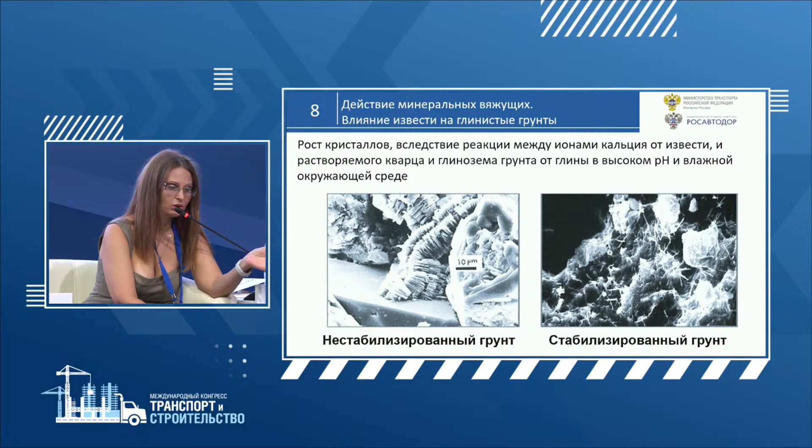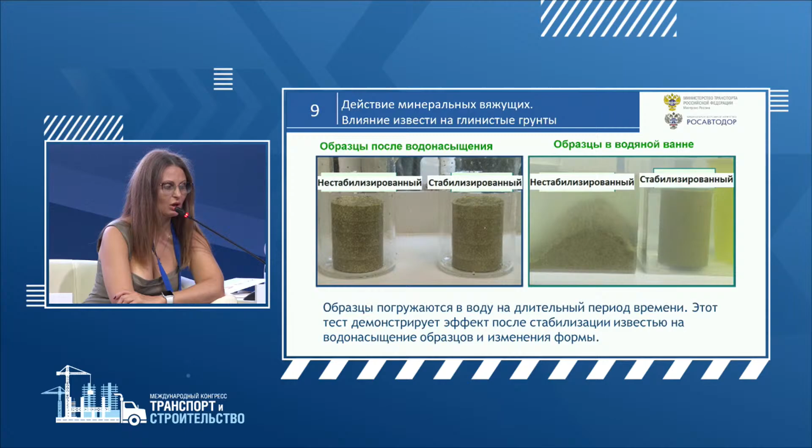And now we see what lime does in such soils. This picture shows, for simple understanding, examples we placed: one was strengthened, one was stabilized, and one was non-stabilized. After water, you see in the pictures the material just turned into a pile, but the stabilized one kept its form, and the same will happen with the road.

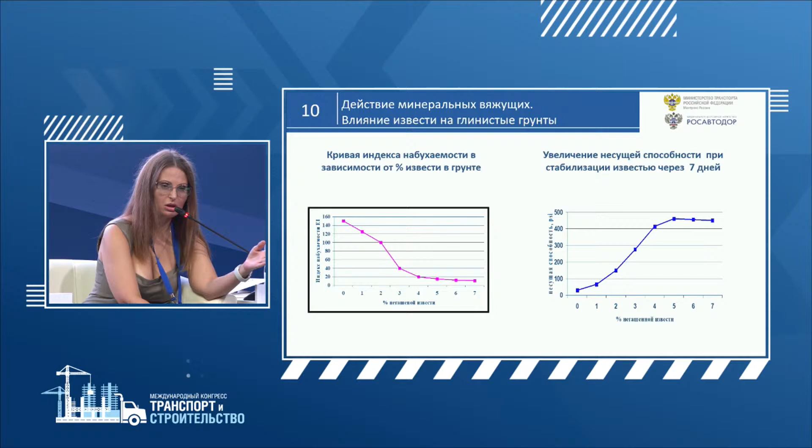And what can we do to establish this road, to commission this road? We need to answer the question: which day, how many hours do we need for the client to commission this road? When you get the contract, you think the project over. This project includes technological cards, your technological cards according to the norms.

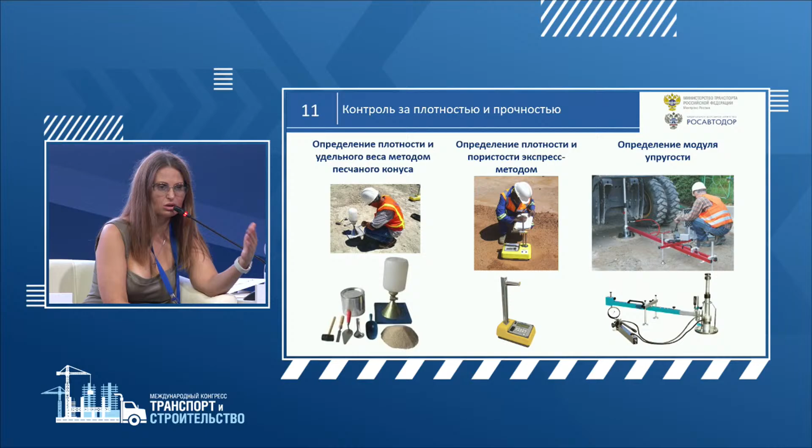The information about the commissioning and the time limits for commissioning should be included in these technological cards. On which basis? You can just show it. Maybe you don't need to wait for 28 days. You may control the density and porosity level. But if this soil is strengthened enough, this modulus will show the results practically at the same time.

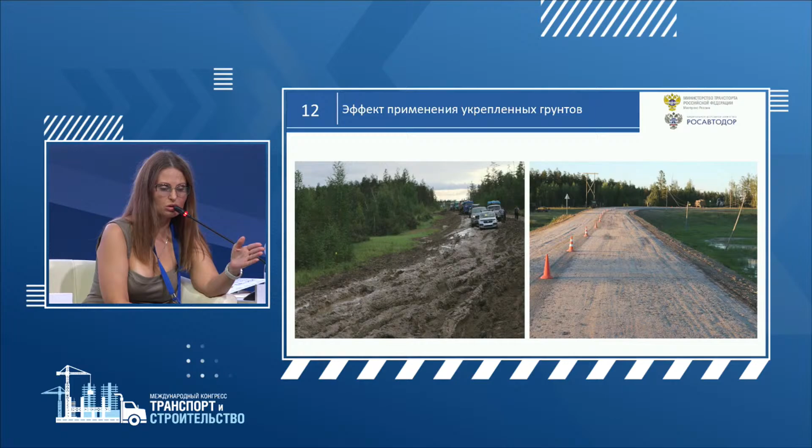This slide shows the effect of using strengthened soils. This is a very bright picture of a real road in the Kolyma region. The soil shown here exists at some places. This is semi-permafrost, and this picture shows what happens with the rain coming. What can we do? We can stabilize it and make a very good base for the road.

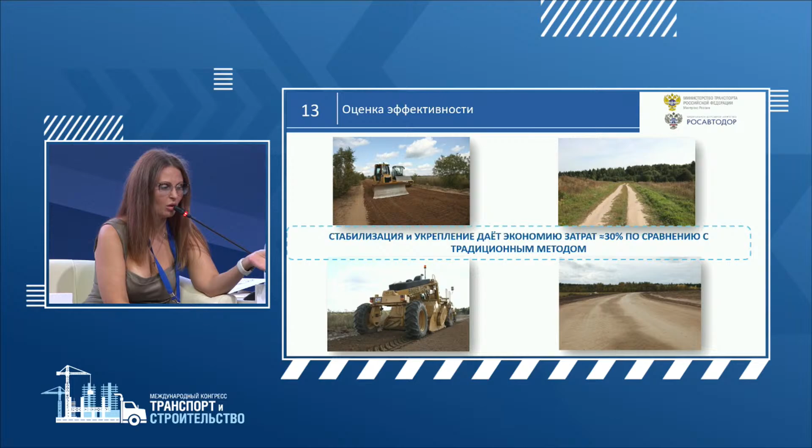The economic effect is calculated. Firstly, there is a 30% economy in financing. You don't need to bring extra material except for some binding and the equipment for introducing this binding. So we move on to the new technology: regeneration of the road pavement layers.

It's great that the Republic of Bashkortostan never surrenders and doesn't stop the work. I'm involved in this project, and it's great that this work goes on. So, regeneration of the pavement. We use it when there is a road and we need to return it to the normative state. This allows the road workers to repair the road.

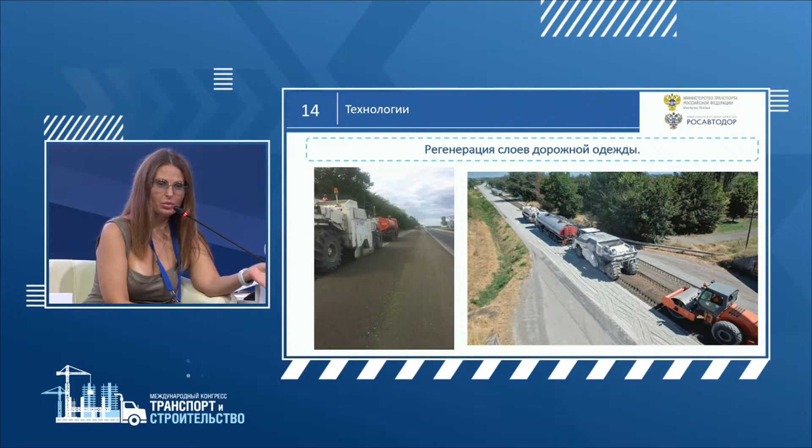We use old asphalt. We use the base that it has. We work with some binding, complex binding or mineral binding, and then move on with this technology. And then we get a sustainable layer. There are the documents. Of course, there is a problem in that PNST 306 stopped working in November 2021.

But I want to say that we are talking about state norms, and they're working on it, in this field and in many fields. They're doing a great job. There are a lot of tasks for us, especially since Western help stopped; now we need to work on ourselves. But the old methodological recommendations never disappeared; they exist. You see these norms. There are some life hacks, as I call them, that we may use in work.

Regeneration is the technology of reworking the old asphalt material. What is included in this regeneration process? We cut the layer, break it into pieces, then we mix these components. Generally it's easy. The peculiarity of this technology is restoring the monolithic state of the construction, and it is required when the existing asphalt layers look like crocodile skin. The upper level is in a state where it should be taken out.

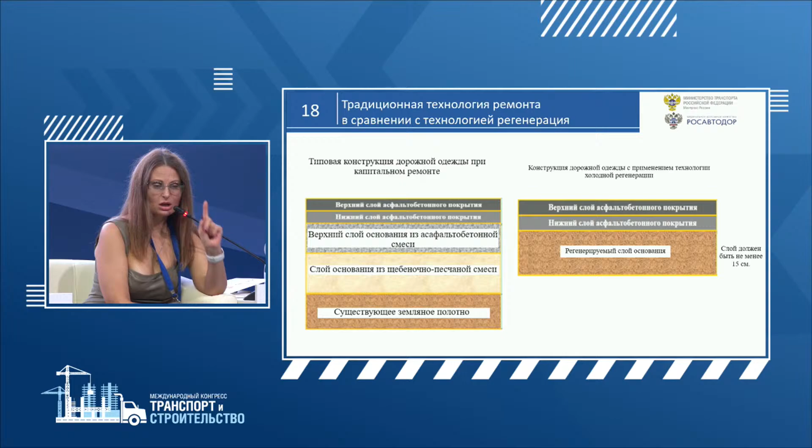Pay attention to that. This regeneration recycling lets us achieve the strength, and thus we can lay 1 or 2 layers of asphalt concrete, again paying attention to the type of the road and the intensity. But also, here's a tiny note: the regeneration layer shouldn't be thinner than 15 centimeters. Please, design engineers, clients, and everyone, pay attention that only 15 centimeters will work.

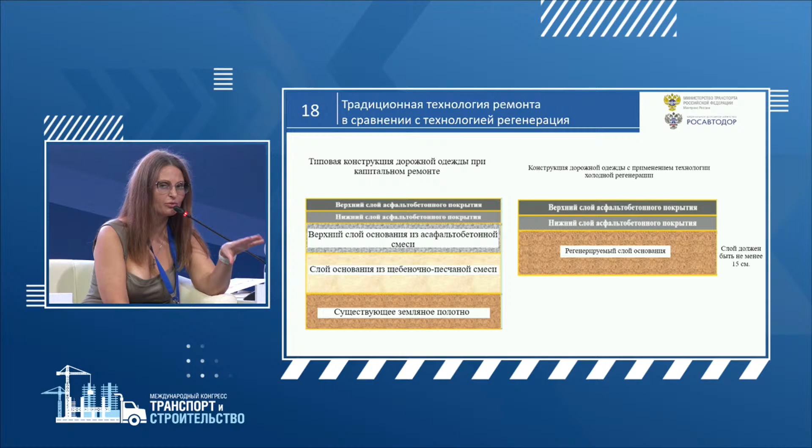Everything that's thinner will not, especially if machine recyclers are applied here, because the machine with a thin layer will not work properly. It won't mix it in the right way. Some people say yes, some people say no about the work of these machines, but they agree that this is the optimal 15 centimeter layer that we need to maintain.

Talking about the selection of recycling materials, when people start selecting this, there's a question: how much new material should be added, how much bitumen or cement should be added there? Well, actually, everything is really easy. Especially for this presentation, I divided the whole process into stages. First, we need to understand the thickness of this package. We should analyze the site with estimation of asphalt and cement that was applied earlier. We also need to understand the places for samples and take some drill samples.

We can't take those drill samples or core samples along the axis. When our presentation finishes, you can take these slides and understand these stages for yourself, because here they are written in very good detail. Also, you can see the amount of bitumen in the samples and how much crushed aggregate remained in those samples, and the amount of cement material can also be understood. People always ask me about that, so that will be a really good manual for you.

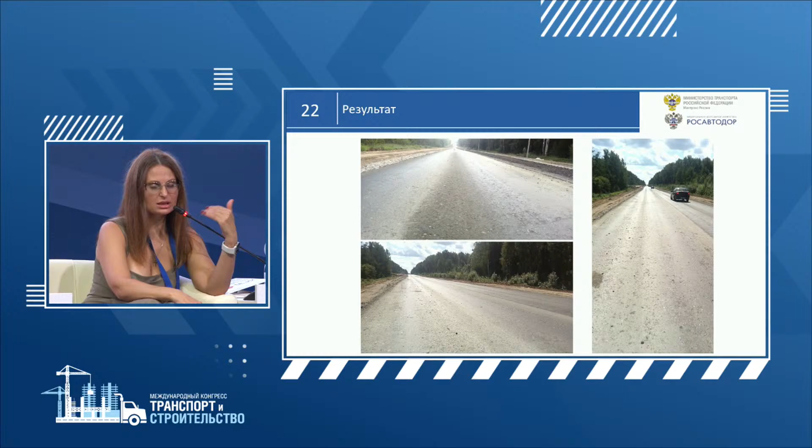One more thing: regeneration or recycling, stabilization, strengthening soil. The flatness of the surface is the basis for the strength, for the solidity of the lower layers. In the picture you can see the perfect surface, because if it's different, when cars are driving over the surface, some destruction appears on the top surface and everywhere. So the flatness of the surface is very important.

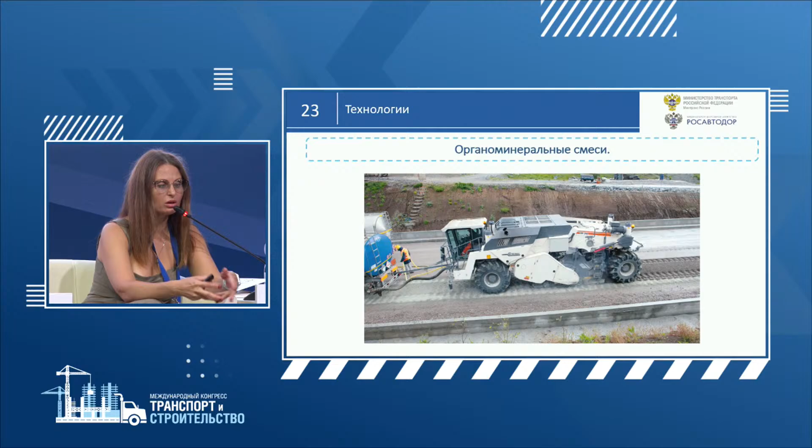Also, organic mineral mixtures are very important as well. In our country, organic mineral mixtures are not widespread in application. It's very sad, because I worked in the northern part of our country, and when I came back here, I saw that here this technology isn't really applied, and it's very good.

There are some regulations like GOST 30491 and PNST 632, which are written very well. Also, PNST 306 refers to this type of technology, and all of them are really good for the layers or foundation, especially the top foundation layers, and they work very well in terms of flexibility and everything. And if we talk about compression, it also works perfectly well.

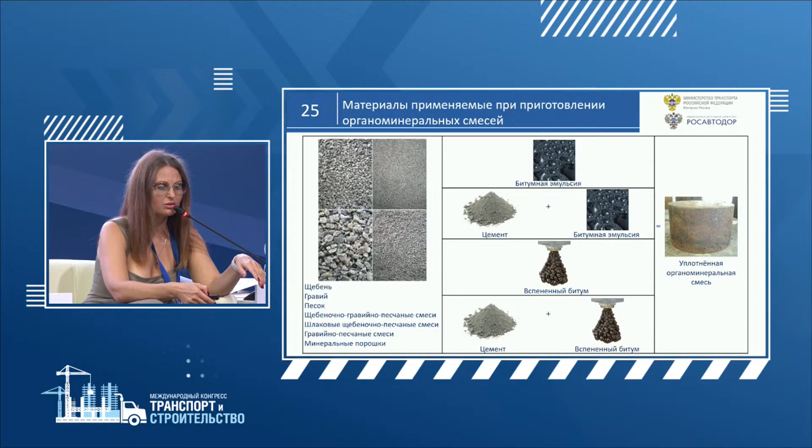Here on the slide, you can see different materials used for organic and mineral mixtures. When we select materials for this mixture, we always need to add some bitumen emulsion or binding, because it's included after we hydrate the material. Very often we get negative feedback on this technology just because this basic rule is violated in the first stage. So we need to introduce this emulsion only into the hydrated, moisturized mixture.

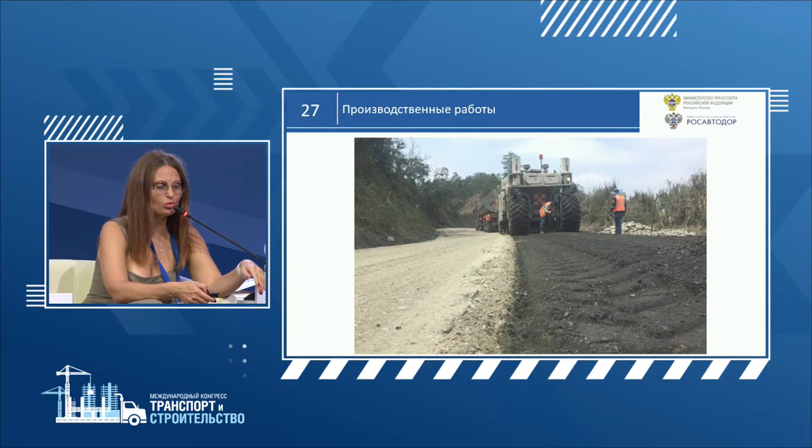Here in the picture you can also see lab samples being prepared, and also production works with different types of recyclers that provide good results. The most important thing is comparing where it's better to apply these mixtures in the constructive layer. Usually organic mixtures are applied under the asphalt concrete layer according to PNST 542, and this emulsion helps in forming the constructive layer for the foundation. If this mixture also consists of strengthened soil, that will be the best solution for road foundation construction.

So nowadays the Kazan-Yekaterinburg part of the road will be built with this type of road coating construction. We've agreed on that.

One more important thing: all materials and technologies that consist of cement active binding substances should be treated in the right way. The layer should be covered to avoid loss of water, because if it dehydrates, the mixture will stop working. This prevents you from getting the necessary characteristics of the layer, or the proper application of bitumen emulsion, for example, or any other strengthening material.

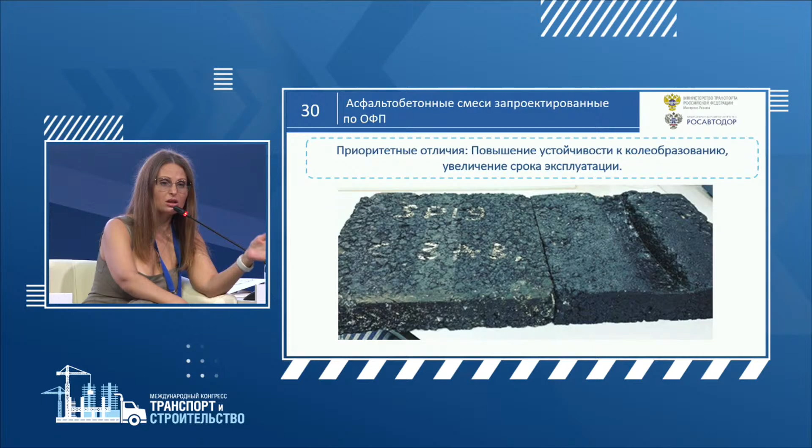We're moving to the last but not least technology, which I think is really efficient for construction: the volume functional design of construction mixtures. That's some kind of appeal for road constructors, clients, and road builders that will help us avoid wheel track someday. If this is built on a very strong, solid foundation, we will finally stop repairing and start constructing - that's what we really want.

Those asphalt concrete mixtures designed with this volume method have the following advantages. In labs, when we compact those samples, we reproduce what's going on the road, because the gyratory compactors reproduce all the compactions from different road vehicles that follow. Everything we compact is bound to all the exploitation parameters.

Also, control of everything can be implemented online - we don't have to wait for lab results from drill samples and so on. We can also understand the climate zone, not just by looking at a special table, but understand exactly what type of material and binding we need to apply in a particular climate region. Also, now we can understand the transportation load for designing the asphalt concrete mixture and so on.

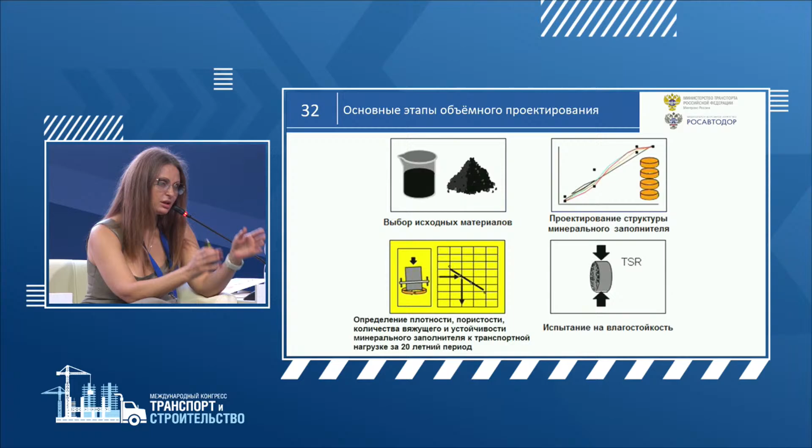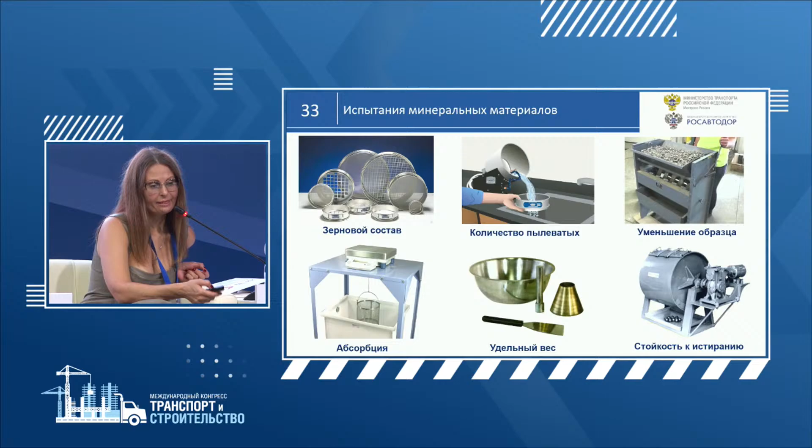But now I would like to ask you to take tests for water resistance in labs when you use this volume technology, because you can't avoid this test. Sometimes you think, I may not do this test because I'll understand everything anyway - but no, please do that test and don't lay any concrete without this water test. We also have very simple equipment for checking the type of materials and everything.

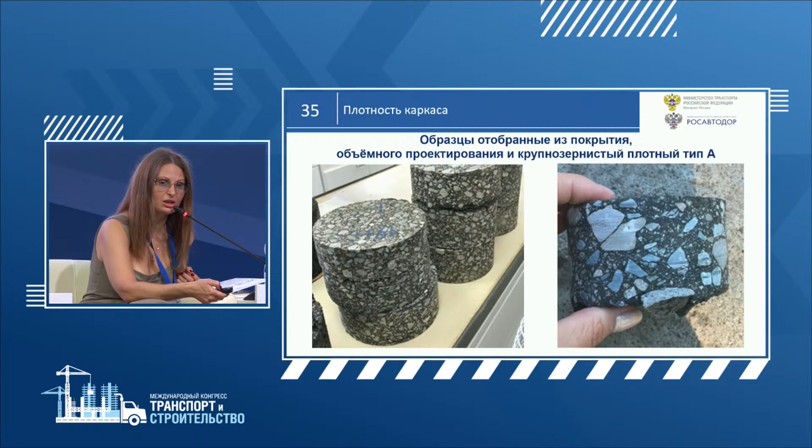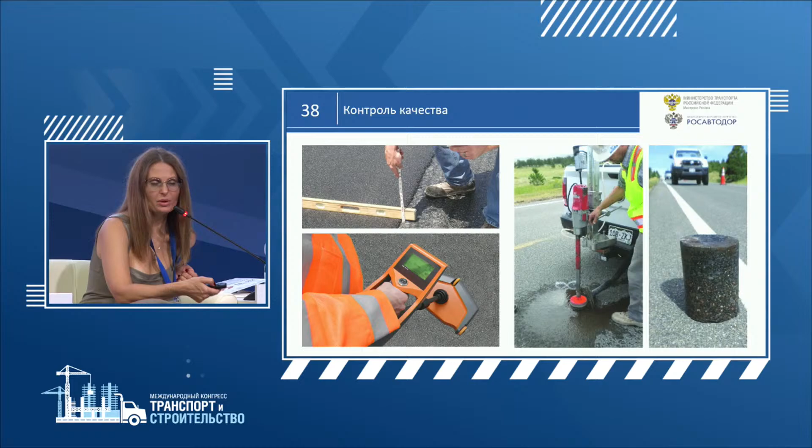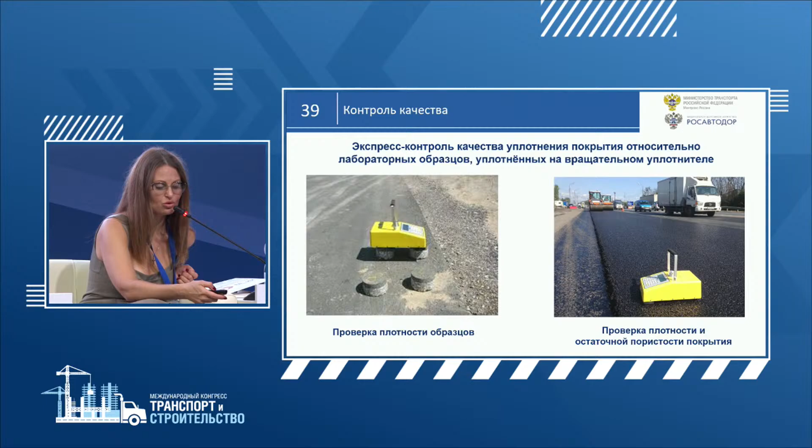So of course we need to pay attention to the quality of concrete, and when it's being issued from the asphalt concrete mixing plant, we need to pay attention to the quality of roads, and we need to pay attention to the culture of labor and work. When people start appreciating their labor and their work, all the roads will become really good and of high quality. The incoming quality control is really easy as well.

It lets us observe the increase of density online, and it influences the quality of the laying as well. We don't have to wait, we don't have to worry. That's great. So thank you very much for your attention. Thank you.

Olga Gennadievna, thank you very much for your intense and informative speech. Of course, we are out of the time limit, but this topic is very interesting. We're very grateful that we are in trend, that we start producing this asphalt concrete mixture. So as we move on in this field, it's very nice that there is UFA on your slide because we're here. And I would like to say furthermore that we need to stipulate to stop using some norms, of course.

We can't forget about type A. Maybe some roads need type A. Some road arteries need this technology of Superpave. So it's important to understand that the main load is from the wheels on the top layer, but this load is on all layers. It's distributed on all layers, and this wheel track appears not only on the top one.

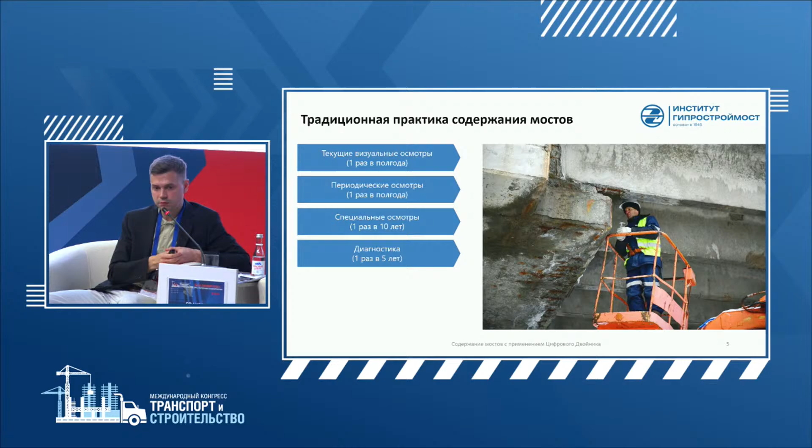So the master has complex surveillance: visual, periodical, special, and diagnostic ones. All these look-throughs are collected into one data set when the planning of the reconstruction starts.

Traditional practice has some drawbacks. First of all, these works on surveillance happen at some stated time, and the technical surveillance has a reactive character. So the repair work starts after finding the damage. We also have this handling method.

Then the documentation can be kept in different and hard-reaching places, and the documentation doesn't have actual data about the factual bridge condition. The documentation is in paper form, so modern technologies can't be used here.

Then our experience in the exploitation period, we use it in projecting new bridges. This could help the sustainability and safety of such constructions together with our experience. According to an analytical report made by a consulting company, it was shown that the usage of paper data at the exploitation level enlarges the funding by 10 to 17%, which is a lot.

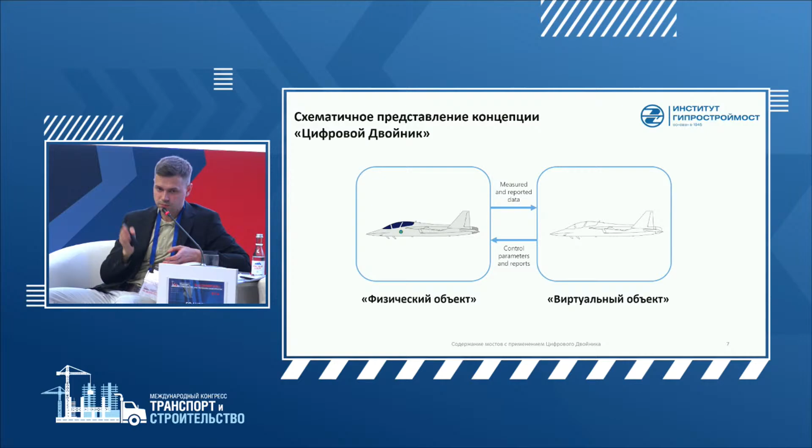So to solve these problems, digital twin can help. A digital twin is when a physical object is synchronized with a virtual one, its digital copy, in real-time measures. Together with this two-sided information interaction, this object, whatever it is—a car, a bridge, or a plane—exists in two worlds: a real physical world and a digital one.

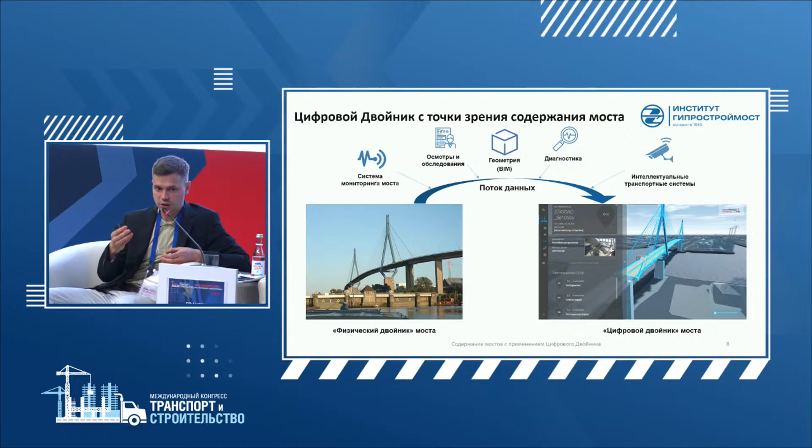So according to the maintenance of the bridge, the point of the digital twin is to integrate different data coming from monitoring systems, from classical look-throughs, from intellectual transport systems, into the digital model of the bridge. This digital twin gets new information, uploads new information, and we always have actual technical documentation in 3D of our physical object.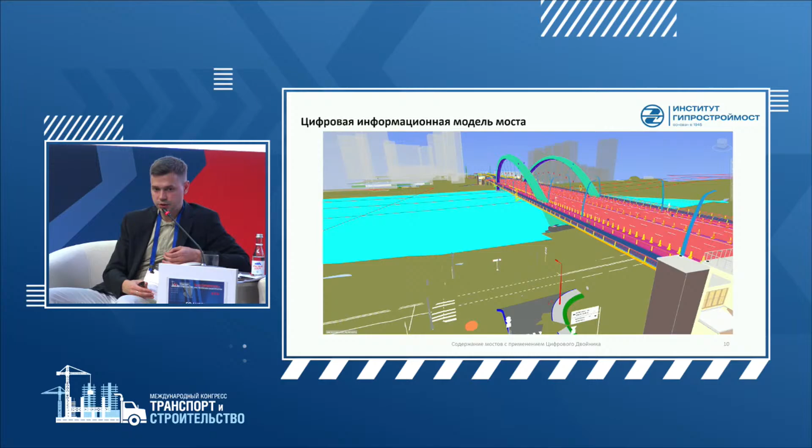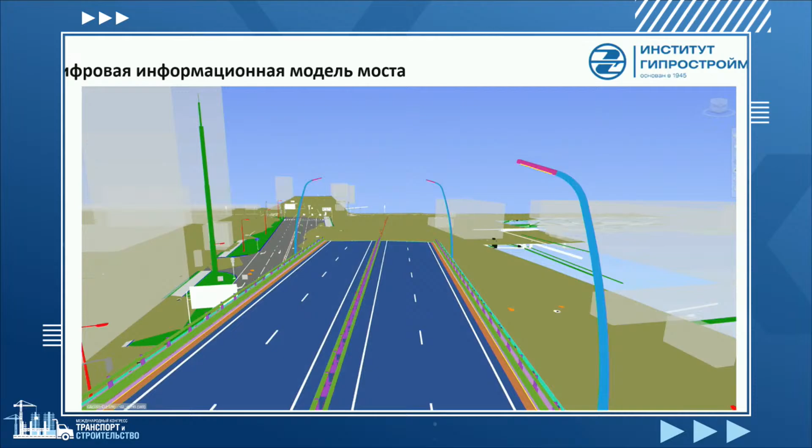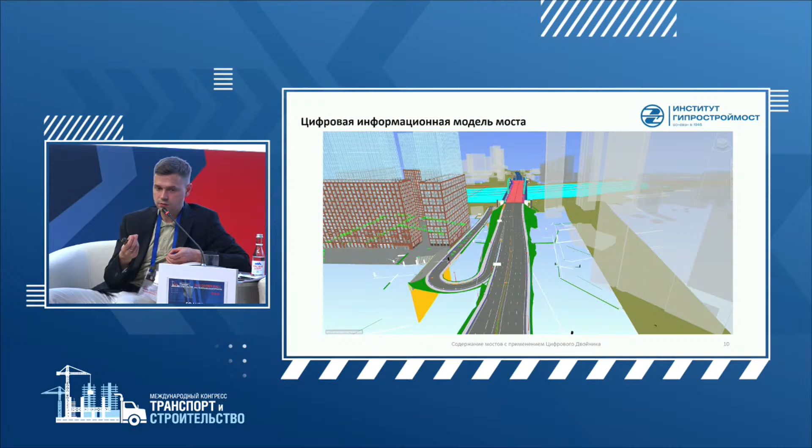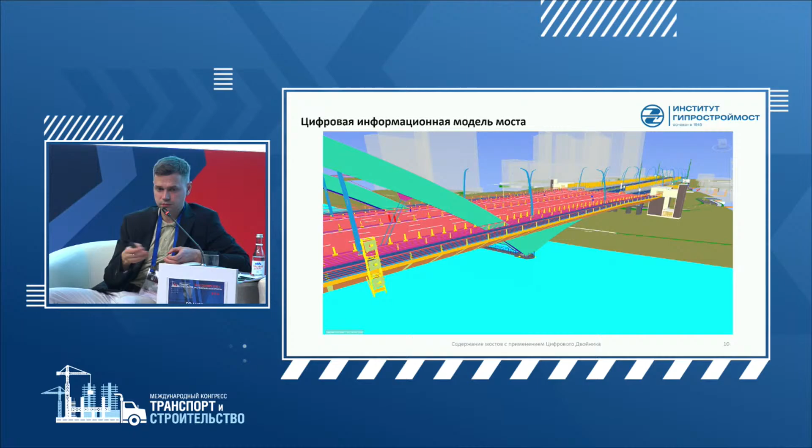Our institute uses information modeling, and together with this model we have the project for a lot of different objects. In Moscow, for example, we have the Moscow bridge above the Moscow River. We need to pay attention that every element of this model has the characteristics of a physical object, but this model doesn't have data about the real moment information. So it's just a digital model, it's not the digital twin.

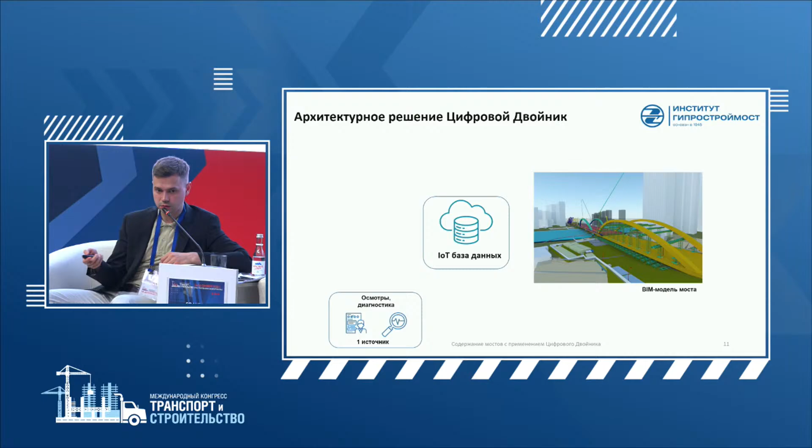How does the digital twin work? So the 3D model is included, which is used with some special software, and there is a special database for that, so it includes data from two sources. The first source is a classic look-through and classic variant of diagnostics. Then semantic and digital information goes, geometric information is reflected in the digital information.

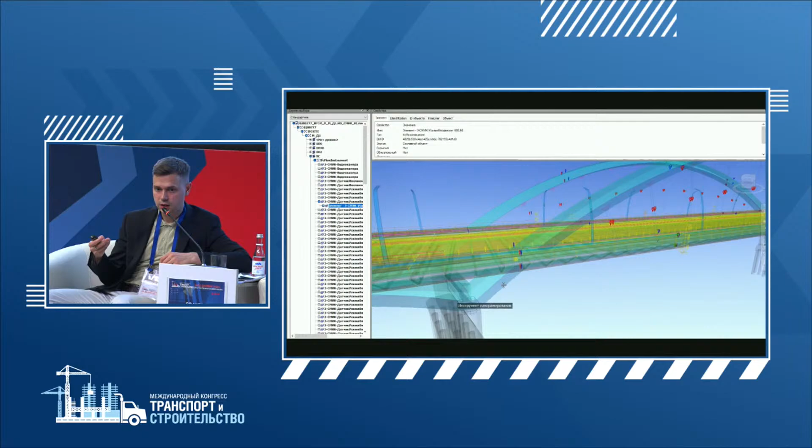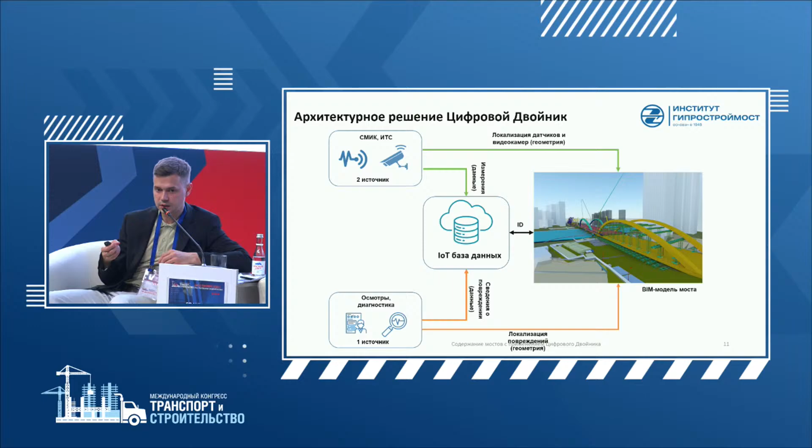The second source is the monitoring system, which is also represented in this digital model in 3D dots. You can see them on the screen, how it looks. So these objects have the characteristics of some data sources, so all the data is consolidated on the databases. The informational model is connected with the database together with a unique ID, so we can see the whole accurate information about the up-to-date condition of the bridge.

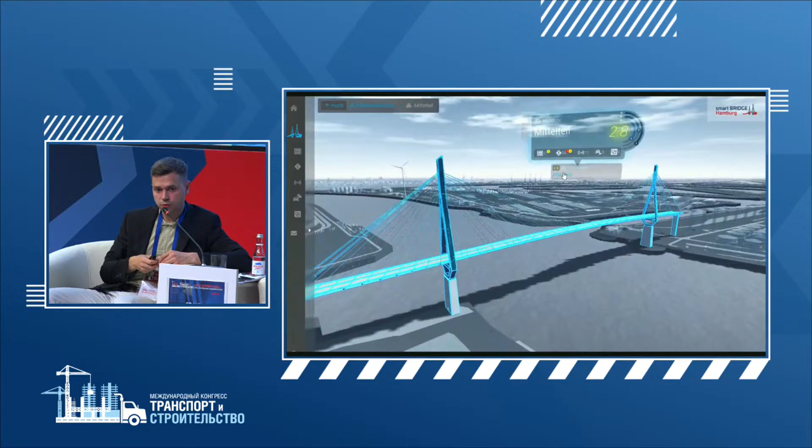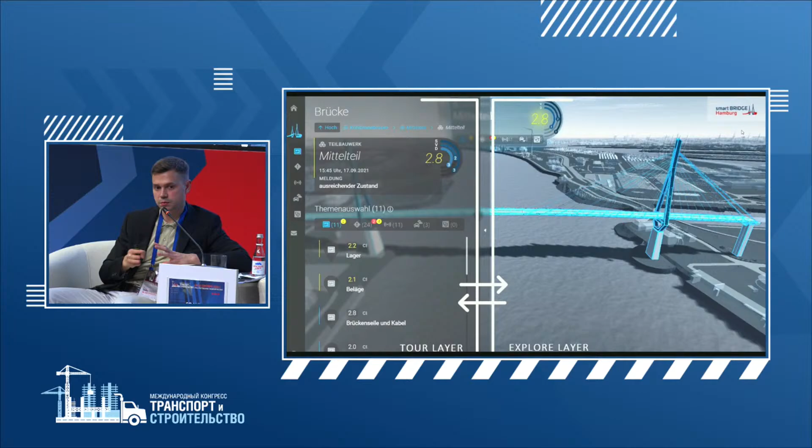So there is the platform which allows you to visualize, to measure in 2D or 3D modeling. So the whole bridge has a model for that, and there is an information card which shows the general technical evaluation of the layer. We see that this is 2.8 and it's in the green area, yellow area. The information about the accurate condition of the bridge can be divided into different topics and fields.

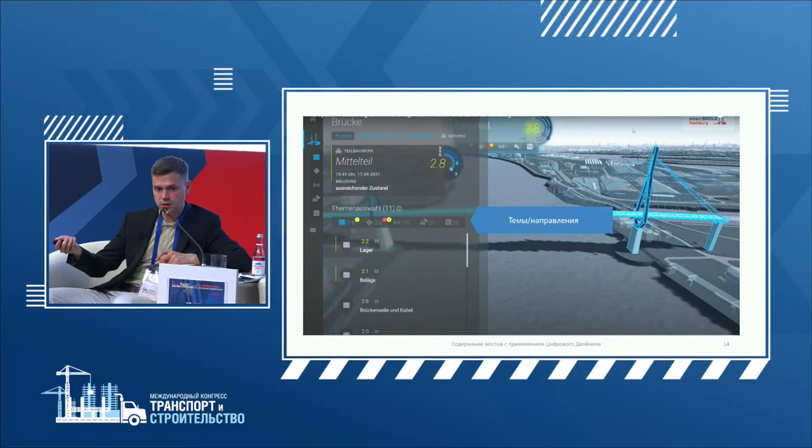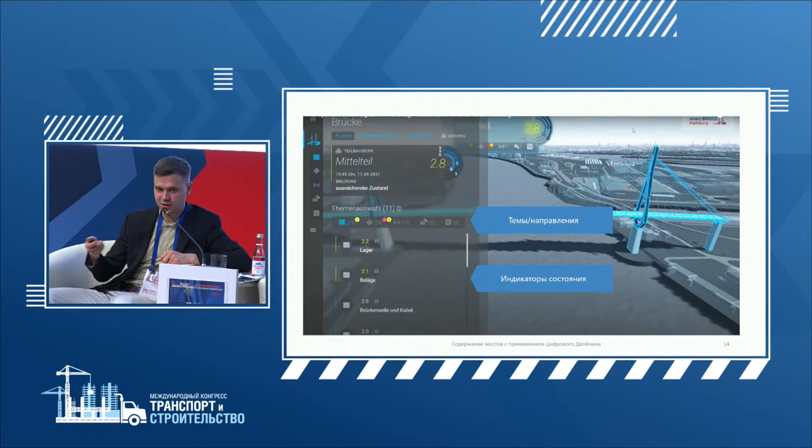Dates, damages, transport, diagnostics, and the monitoring system data. So the condition is shown through the indicators, which are used on different levels of this bridge. It's difficult to say it into words in a presentation, but you can ask me afterwards. So it looks like this.

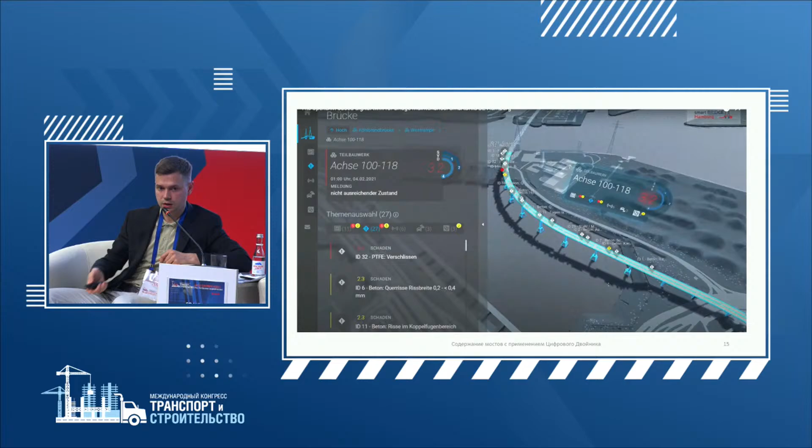So the damages look like this on this model. Every damage has its own indicator of a different color. We see the indicator 3.2, which is in the red area, so it shows that the master should pay attention to it. So this damage goes together with the base part of this bridge.

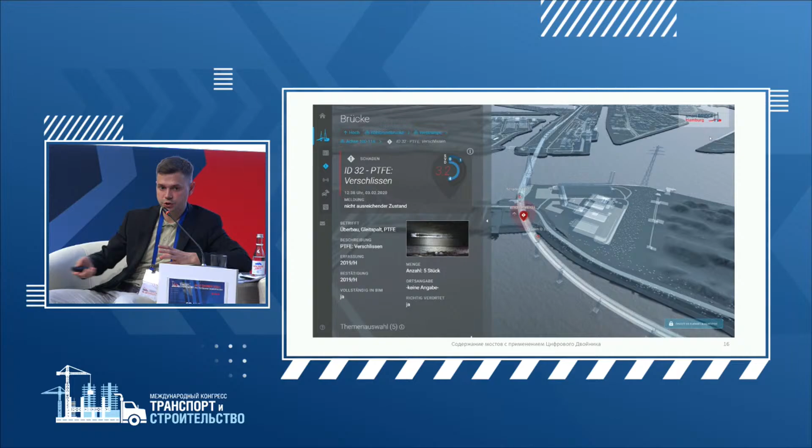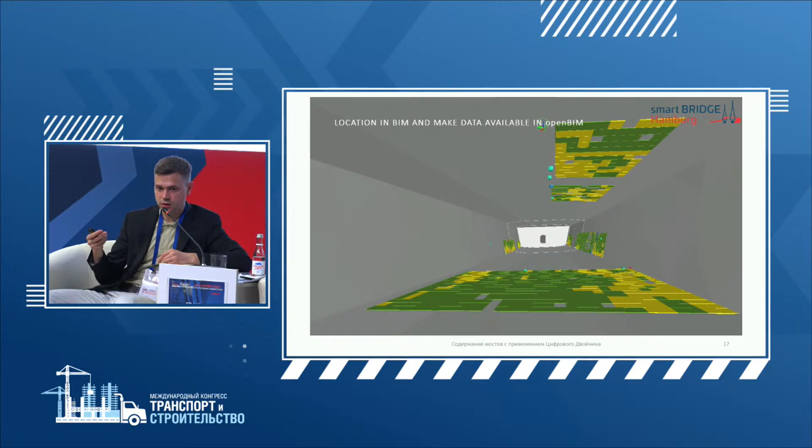So the master can find it in the intuitive sphere and find the whole information about this base - when it was built, what temperature, what damages it has. So together with this objective data you have some measures required to solve this problem. So the localization of damages looks like this after the diagnostic work.

So in the end, I would like to say that not only Western colleagues work on it, our institutions work together with different companies like Traffic Data and InGIFRO. We work together, we test these technologies, and it will help together with the traffic data program to get information about the traffic level. This monitoring system will help us to introduce the actual condition of the construction elements. And all this information will be consolidated in one program and shown on these digital models, which we develop in our institution.

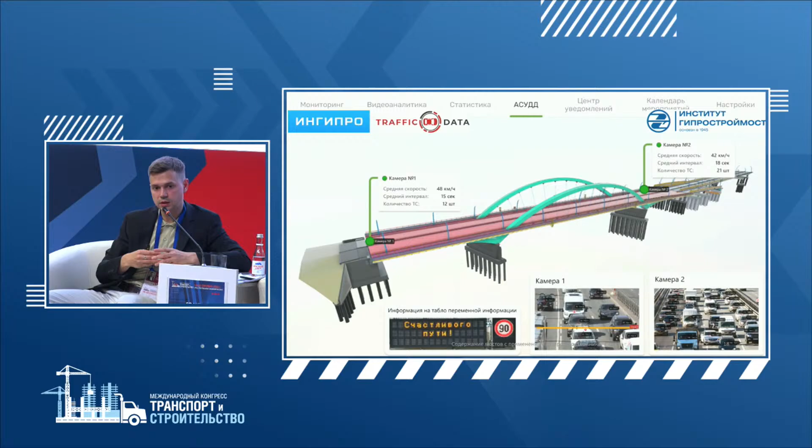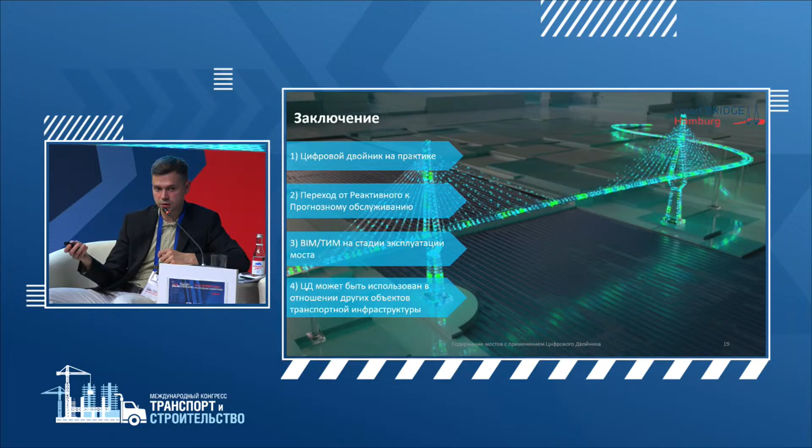This mixture of different companies will allow us to create the digital twin in practice. So this was the digital twin in practice, so in bridges at the stage of exploitation. We've looked through some steps to come from reactive to prognostic maintenance. We need to enlarge this model so that it can be used freely and openly. So this concept can be used for any object of transport infrastructure. Thank you very much.

Thank you very much, dear colleague. I'd like to say that Giprostroymost is one of the hugest constructors in the Russian Federation, and they design some bridges even in Ufa.

And I have a question. Could you please tell me what software you use for this 3D design and those informational models, and are there any local substitutes for that, not some foreign software? You're talking very beautifully about everything, and you attach some foreign experience, but are there any local Russian examples? Well, no, nowadays, no.

Nowadays, we collaborate with Ingipro, Traffic Data, and we have very good local software that is responsible for road construction. But if we're talking about bridge construction, the situation is not very good. We can't substitute imports right now. So that's all for the future, right? Nowadays, digital twins are our future. No projects in Russia have been realized yet, but that's all for the future. Dear colleagues, do you have any questions?

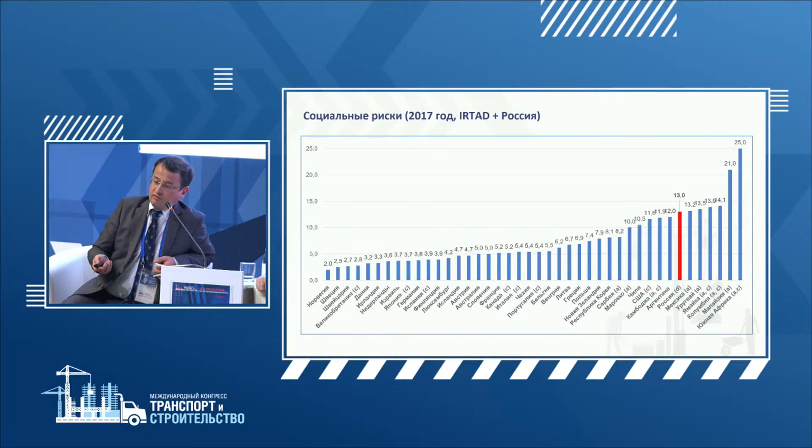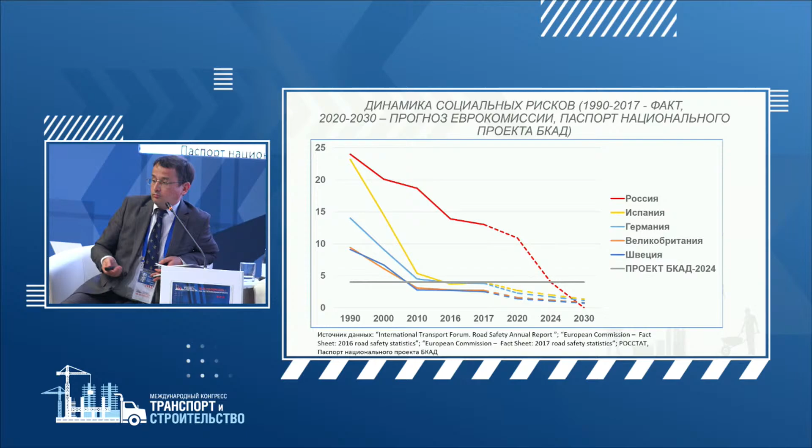If we compare two results, we can see that Norway had a result of 2 and now it's 1.8. So their improvement is not that great. Here in the graph, you can see the statistics between 2020 and 2030, and how those countries that started this way early achieved this level. There was a very intense decrease, and then something happens to the system, and it's more difficult for it to move further efficiently. In Russia, the indicators are a bit different, and we'll have to achieve them.

Road services, police services are always responsible for road safety and everything. But in the local law, administrative law, we can see that the administration, local administration, is actually responsible for road safety, not only the police. So again, there is one responsible party, but other people are also asked for the results and everything.